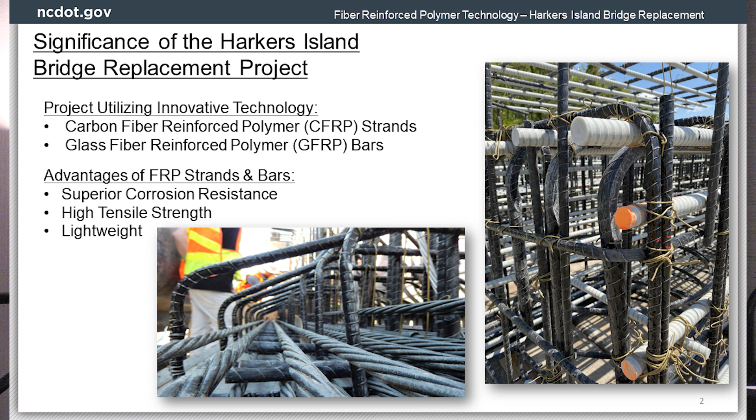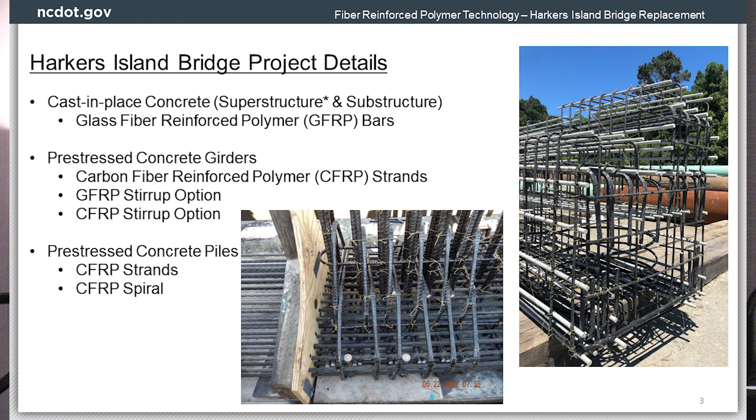For those not familiar with FRPs, the advantages are superior corrosion resistance, high tensile strength, and lightweight. Just to give you a little background about Harkers: for this project, all the cast-in-place concrete will be reinforced with GFRP bars. All the pre-stressed concrete girders and pre-stressed concrete piles will be pre-stressed with the CFRP strands. For the girders, we actually gave the contractor the option to go with CFRP stirrups or GFRP stirrups, but this time the contractor elected to go with GFRP stirrups.

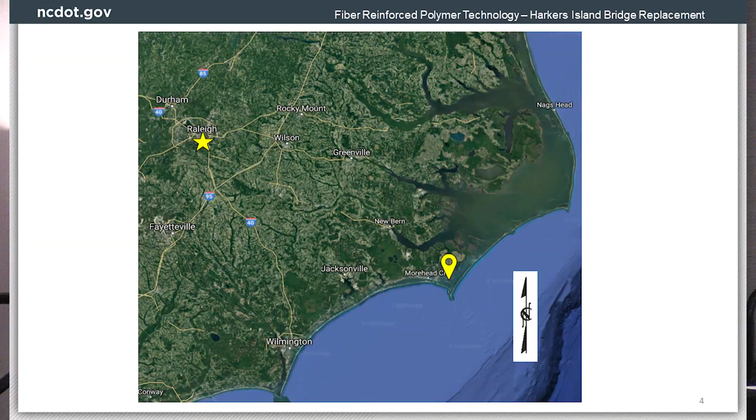To give you an idea of where the project is located, I'm sure you've seen enough maps of North Carolina the last few days that at least you'll know the geography. Here's the eastern half of the state - obviously we're here in Raleigh. Harkers Island is located about 3 hours east, near the port of Morehead City and the Cape Lookout National Seashore. For us, this area is considered highly corrosive, so the use of a non-ferrous material really is a primary candidate for creating long-lasting structures.

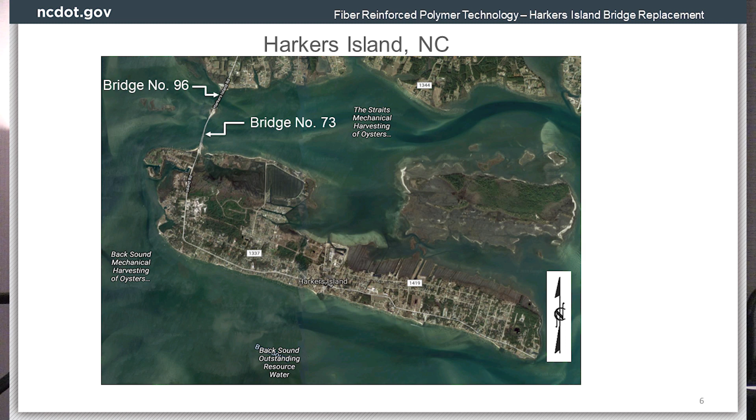It's a relatively remote area, home to 1,300 people, bordered by 2 inlets and the barrier islands. As part of the project, we're replacing bridge number 73 and 96 with a single structure.

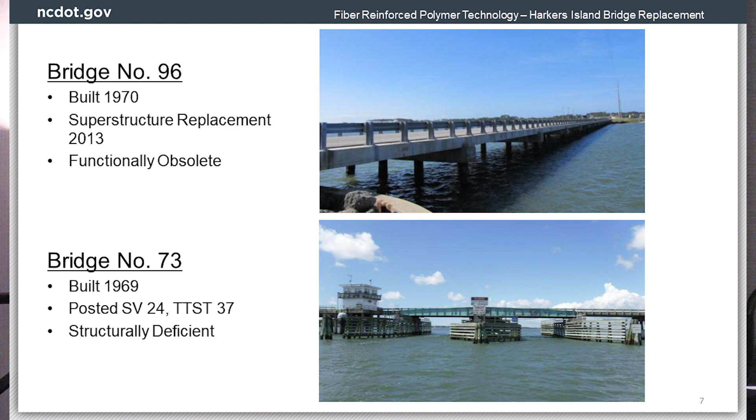Just a little background on the existing bridges: Bridge 96 was built in 1970, 600 feet long. In 2013, it required an emergency full superstructure replacement due to deterioration from corrosion. Bridge 73 was built in 1969, 1,400 feet long. It's posted, structurally deficient, and is a swing bridge. This bridge can routinely have mechanical issues and be shut down to boat traffic. The community is heavily involved in the fishing industry, so having that navigational channel blocked can cause issues for them.

So basically within these bridges, 40 to 50 years of age, they're already experiencing significant corrosion. We've had to replace the superstructure on one. So in looking at the development of a replacement project, the idea of using an FRP that is corrosion resistant really is why we honed in and identified this project as a great option for GFRP and CFRP.

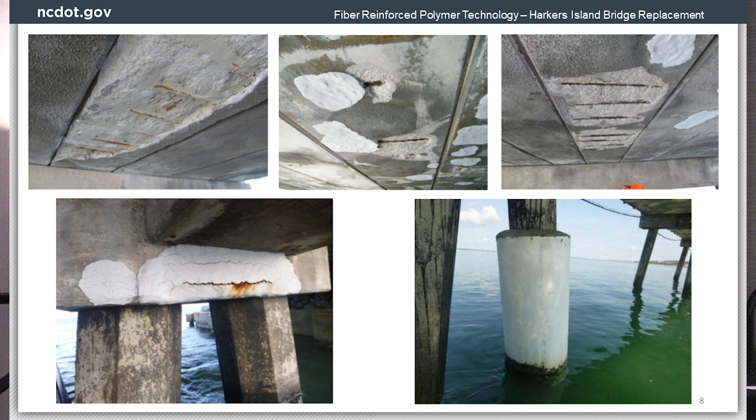Here's some photos of the existing structure. The bottom 2 are the substructure from the swing span, and the top 3 are the cored slabs from Bridge 96, before the superstructure replacement. You can see we've gone in there and tried to make some repairs - they work, but not long afterwards we're still having to go back and provide maintenance.

To give you more details about the Harkers Island project itself: the new bridge will be 3,200 feet long, 28 spans. As I mentioned, the girders and the piles will be using the CFRP - 115 girders.

44 of those girders will be 72-inch Florida I-beams. 56 of those girders will be the 54-inch Florida I-beams, which are about 100 feet long. The 72s, I should have said, are 130 feet. We've got 3 spans of the 78-inch fibs, and that'll include a channel crossing where we have a 165-foot girder.

So the let date was July of 21. Expected completion is 25, and the contract amount was just under $60 million.

Going back to the linear foot, we went through and figured up how many, once the project is complete, of CFRP and GFRP. So right there you've got 100, or 1 million linear foot of CFRP in the girders and the piles, and then close to that same amount with the GFRP with the substructure and superstructure.

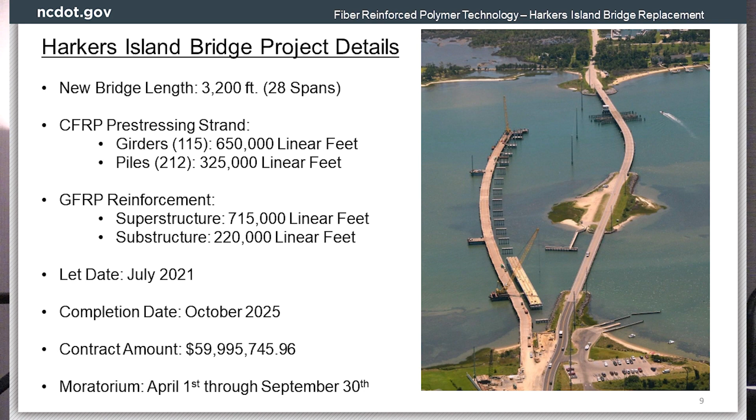I do need to mention the moratorium, so that was a big constraint for the contractor, there's no in-water work between April 1st and September 30th. So again, the project let in July. The contractor was able to start in-water work October 1st. So you can see from October 1st to March 31st, the contractor was able to pretty much install all the 24-inch pre-stressed piles from the abutment 2 side out to the channel.

And that ends up being 141 of the 212 piles.

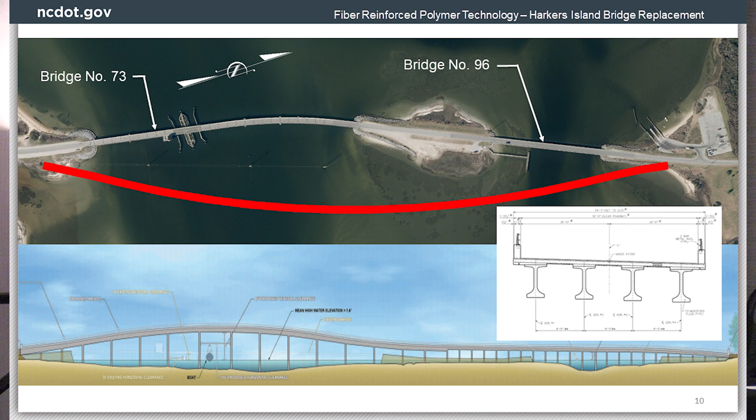The division requested that all the low-level spans provide a minimum of 8 foot of vertical clearance just due to wave action. So just looking at the FRP manufacturing process, I don't know how many folks are familiar with it, but we'll walk through it.

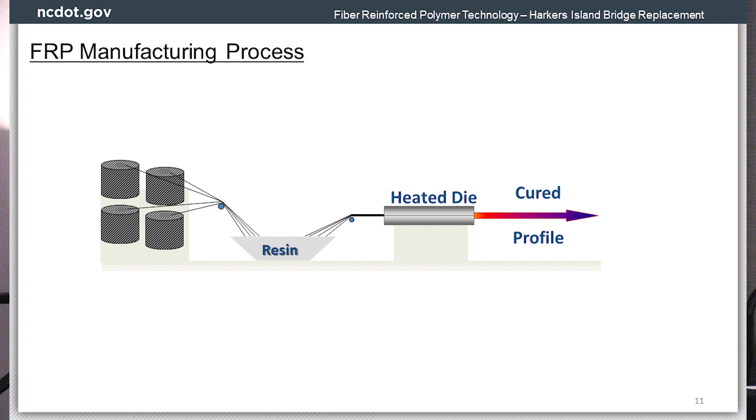So FRPs are manufactured through a process called pultrusion. The process starts as continuous fibers of either carbon or glass are pulled through a resin bath and saturated, and then as the wet fibers are aligned and pulled through a shaped mold, which is heated, that cures the resin. This manufacturing process is one reason you can't field bend FRPs. As a designer developing plans, that's really something to consider, that all this manufacturing has to be done in the plant.

There's no, if there's any kind of bars that show up out of spec, there's nothing the contractor can do, so just something to be aware of.

Again, it's really not a direct substitution. It's not a one-to-one on FRPs and conventional steel. The biggest thing is really the modulus of elasticity.

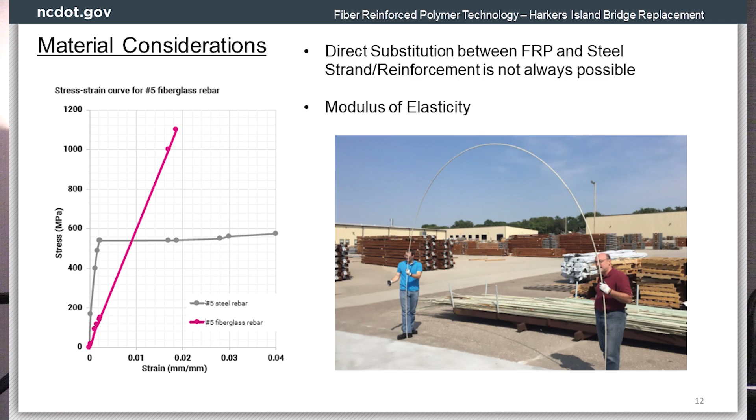So just a comparison between GFRP and steel reinforcement. You notice the guaranteed tensile strength for FRP is much higher in most cases. You do not have the yield strength, as I mentioned, and really keying in on that modulus, it's basically a quarter of what steel is.

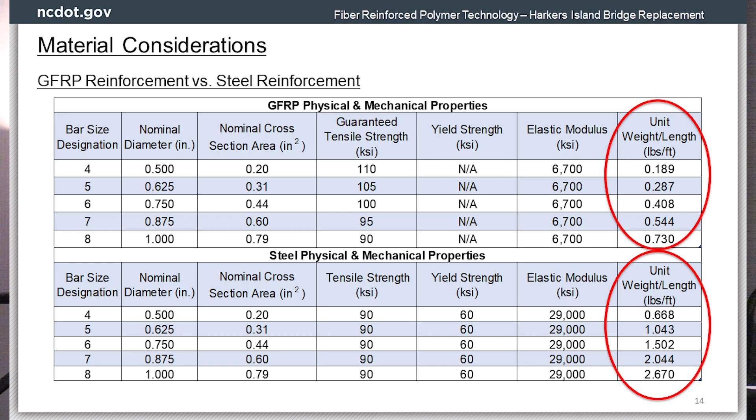I will point out the unit weight, which is, if you look at that number 8 bar there, it's 0.73 pounds per foot for a GFRP bar versus 2.67. So as you can imagine, a 60-foot number 8 bar is going to weigh roughly 160 pounds, whereas that same bar in GFRP will be 45 pounds.

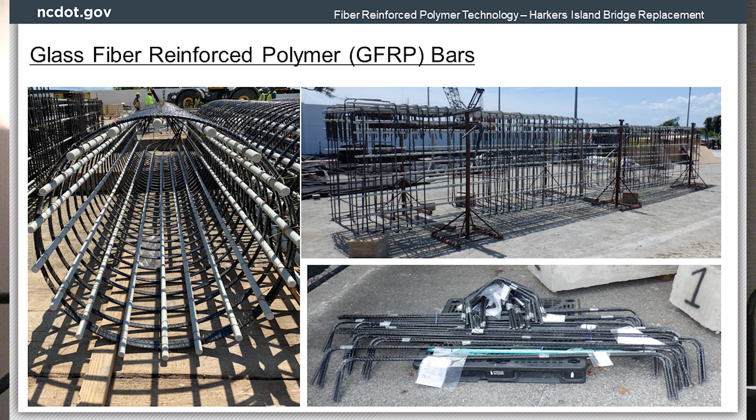So just showing some of the pictures from the site. The picture on the left is our column reinforcement for the pile footings on bents. Top right is a bent cap that's tied up, and the bottom picture shows the stirrups used for the pre-stressed girders.

I'll mention the black bar and white bar. The black bar, through the manufacturing process, is what the bent bars are. So any black bar you see, that's a bent bar, whereas the straight bars are the white bars.

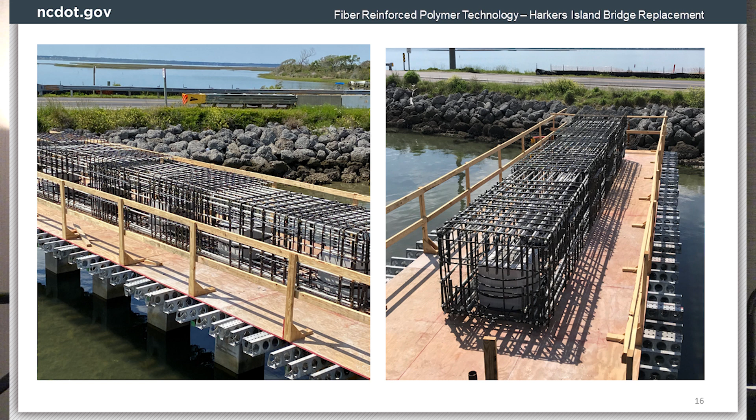A couple of bent caps with reinforcement in place, ready for side forms and concrete. Again, it's not a one-to-one substitution, so you end up with a fair number of more bars with GFRP, but discussing it with the contractor, he increased his slump and really hasn't had any issues with pouring, no issues with honeycombing. As long as we're aware of what we're getting into, it seems to have gone very smoothly.

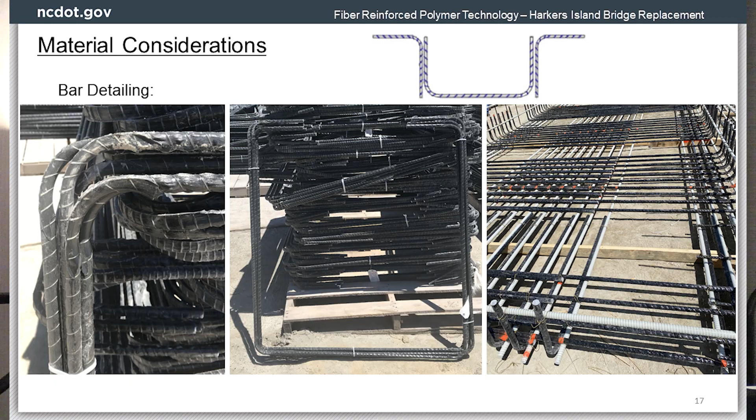The photo on the right is the bottom mat of one of our footings. Again, one limitation with FRP is the amount of leg length they can bend. The black L-shaped bar only goes a certain length before it's spliced with the white longitudinal bar that runs the full length of the footing. You've got to take those considerations, and you're obviously losing clearance between bars once you factor in the splice location.

Also, all of these bars in the footing are number 8 bars - that's the largest bar the industry can bend at the moment. This technology is changing, so when we developed the plans, that was the constraint we had. Not to say they can't bend larger bars now, but that was one challenge we had to overcome.

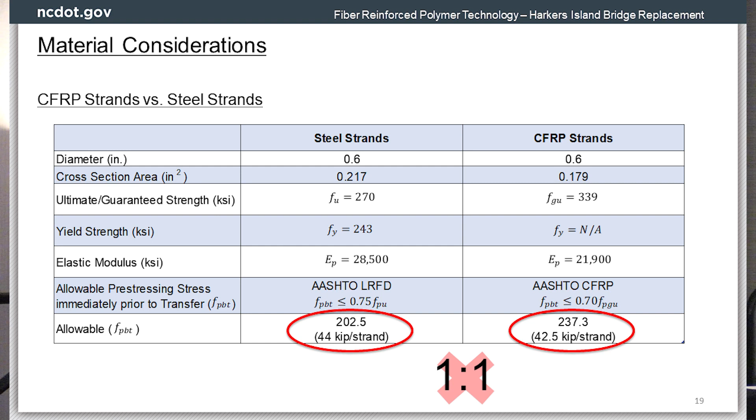Looking at the comparison between CFRP strands and steel strands, notice the guaranteed strength is 339 KSI versus 270, and that has since increased quite a bit. So factoring that in, it's basically a guaranteed strength of 60 kips for a 6/10 CFRP strand. Notice the modulus is slightly lower. The knockdown factor for AASHTO is lower for CFRP, so your allowable pull strength is slightly lower. As mentioned, the guaranteed strength has since increased, so it's more comparable, but there are still other factors in the design to consider.

We've partnered with NC State to do the QA/QC material testing for the project, and the guaranteed strength is listed at 60 in this case, but pretty much all the strand they've tested is breaking right around the 80 kip mark. So very conservative.

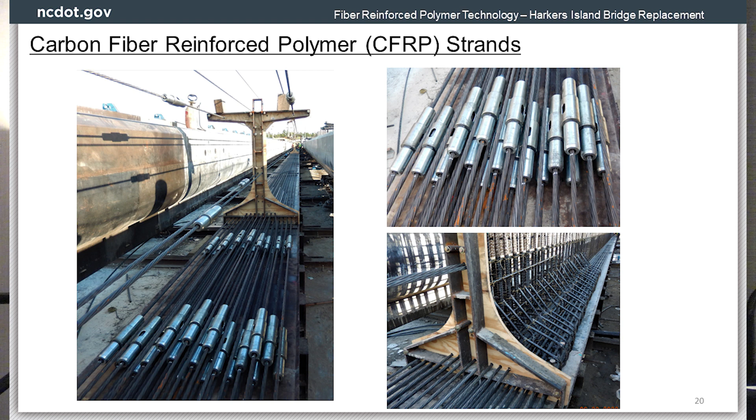You'll notice in the picture on the left, for a girder, you have a fair amount of strands in the bottom of the flange, so the precaster has to stagger those couplers, because otherwise if you had them all at one location, it just wouldn't be possible. That's one thing that needs to be considered as they're laying out their bed.

Here are some more photos of the girders. One thing for this project, we really didn't want any ferrous material in the girder, so we made a compromise and allowed them to use stainless steel lifting loops. But the precaster did request some courtesy strands to tie the GFRP stirrups to. They were concerned that if you tie the stirrups directly to the CFRP, it could put a fair amount of weight on there and potentially rupture the strand.

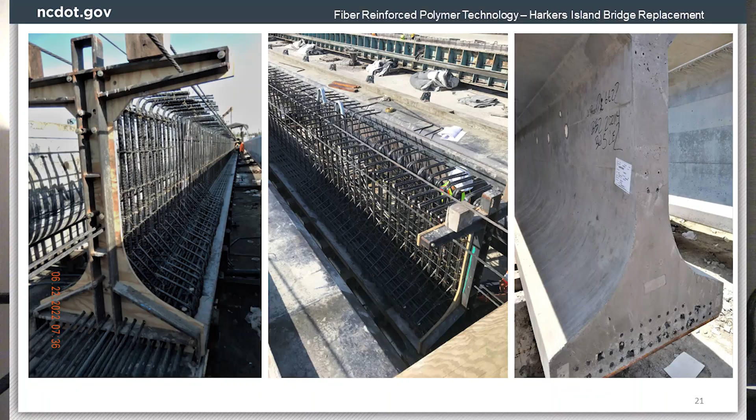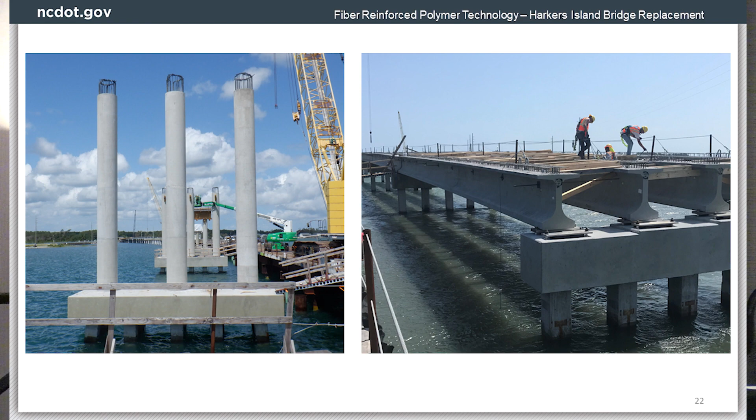As I mentioned, this is a corrosive site for us. Typically we would have precast, pre-stressed deck panels for the formwork, but we went with a lightweight deck in this situation, so the contractor's using removable forms. There you see, I think they've set 7 spans of girders so far.

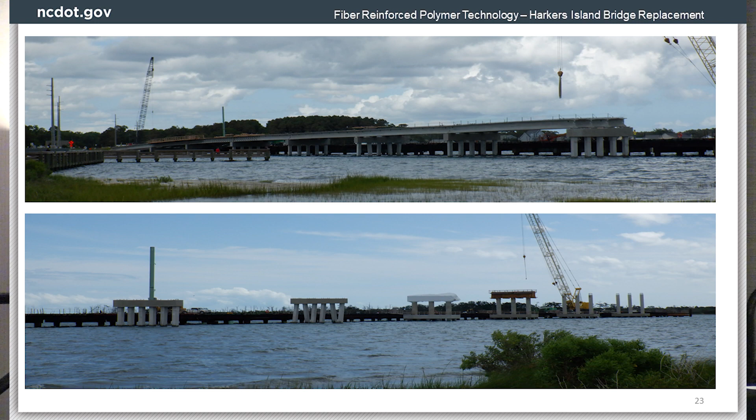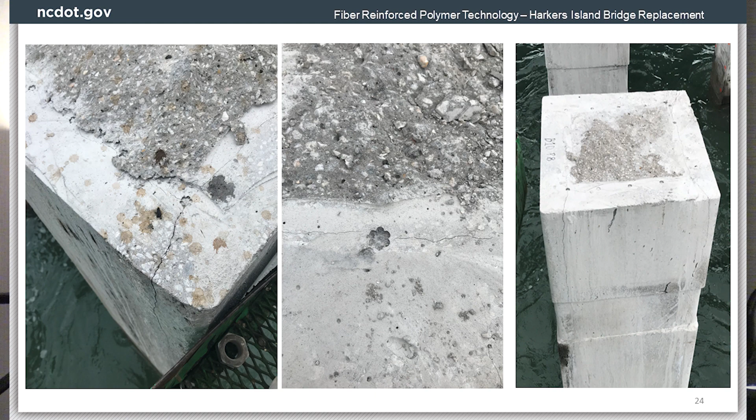Bents 8 through 14 there on the bottom. It's really impressive what the contractor's been able to accomplish in the first season. I think it's important to note that these materials are new and different, but the contractor's still able to carry on, meet schedule, and hasn't had any significant delays due to the material—especially even with the pile driving. Once they started driving pile, the comment was it's no different than conventional pile.

So I'm going to spend the next few minutes talking about lessons learned so far. Speaking of piles, one thing we learned is you have to consider the Hoyer effect, for those not familiar with it. It's basically as you stress that strand and then relieve it, it tries to return back to its original diameter—so you stress it, it necks down, relieve it, and it tries to return back.

For the first few piles that were driven, the contractor had a short window—he didn't get the project until July, so they immediately started casting piles and getting them to the site. October 1st they started driving. The way his template was laid out, if we had any battered piles, they had to go ahead and cut them off, and in doing so, once they cut them off, cracks started forming.

That was very alarming for us, and we weren't quite sure what to do about it. Going out and actually looking at it, the cracks conveniently were within the first 2 to 3 feet or so, which is the transfer length, and that's what ends up being embedded in the bent cap. So we felt comfortable—the cracks were solid, there really weren't any structural concerns.

But the interesting fact is that as they progressed—these piles were about 3 months old at that point—later in the season, once the moratorium was over and they were going back cutting the plumb piles, the photo on the right shows there's no issues, no cracking, no recess of the strand. These piles were, at this point, 6 months old.

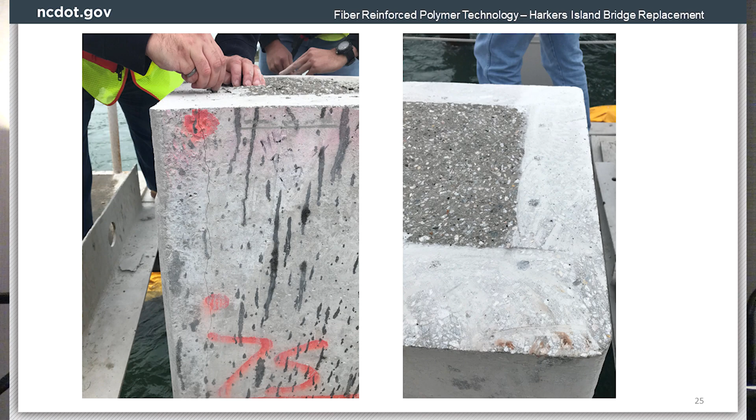It's 10 KSI concrete. So looking forward to maybe the next project, or even the island side of the channel, for those piles, if there's some way to build in a waiting period, that would be a good idea, because from what we've seen, you really don't have that cracking issue.

So that's something we're going to continue to monitor. Speaking of the Hoyer effect, we had this happen, and then several months earlier we had our first girder casting, so we really should have considered that.

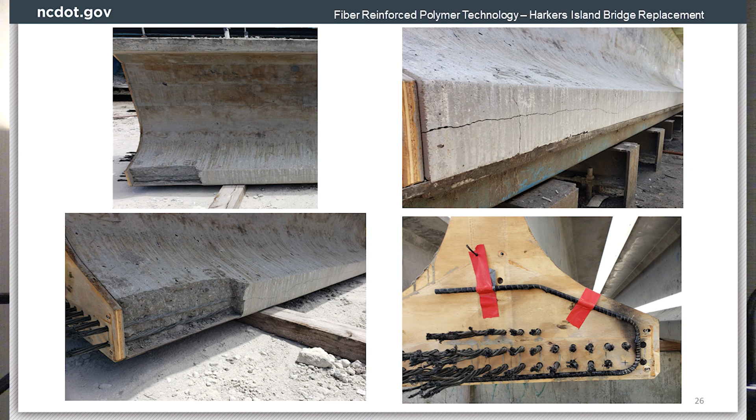They cast the first 3 girders, and this is what happened. For our typical steel strand configuration on our bulb tees, the 2 exterior strands are outside the confinement bars. In this case, we went along with that similar strand pattern, and as you see, it busted off the end section there. Again, it was 2 or 3 feet. The crack did continue, but it was fairly solid. So what we ended up doing, bottom right picture, we made sure we bring those strands inward of the confinement bars, and since that time we've had no issues with those types of cracks.

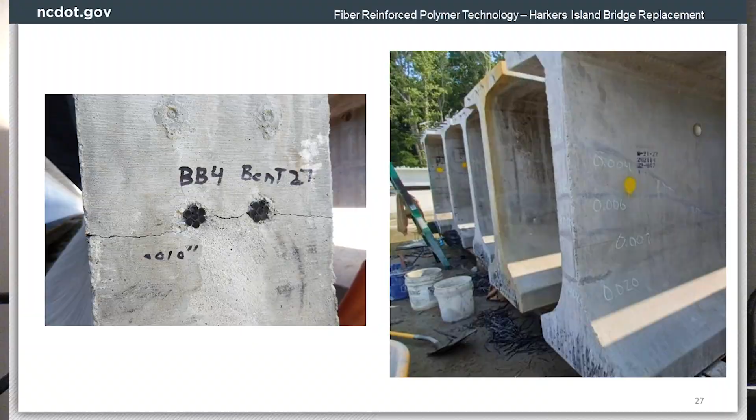Some more lessons learned from the girders. The picture on the left is the 54-inch bulb tee, with 2 strands in the web. We've got cracks forming along the web face, again 2 to 3 feet. On the right is the 72-inch bulb tee with web splitting. One thing we've done is increase the debond. We've debonded those strands in the web on the 54s 2 or 3 feet, and that's really done away with that cracking. We've increased the debond on the 72s and we're still getting some cracking, but it's minimal compared to what we were getting those first few castings.

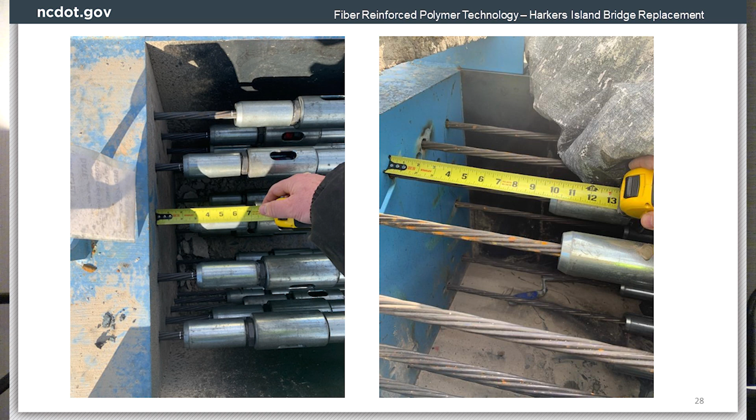The last lesson learned isn't so much for the designer or bridge engineer, but more for our M&T inspectors and the precaster. With casting the pile, in order to get economy out of their beds, the precaster ended up with a lot of short sections where the steel strand was basically right at the end of the form. You see the couplers there for the piles, but in those photos you really only have 2 or 3 inches in some cases, and in some cases 10. Certainly there were situations where they had much more to work with.

One issue we had during the first few castings is that as they were detensioning the beds, all of a sudden all of the strands would spontaneously detension themselves. Certainly a concern there, and I've got a short video I hope we'll play.

How do you play? Where's the mouse?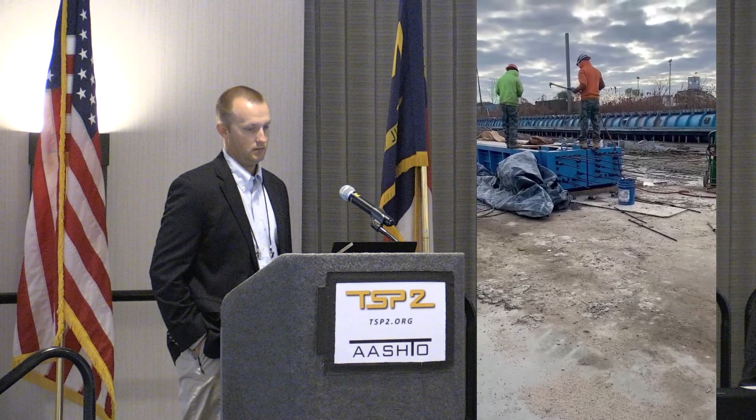Cables popping by themselves. So there you can hear the strands starting to go.

It sounds like he's seen this happen a time or two. This is not the first time it's happened.

So that's just something we're going to continue to monitor. Certainly it didn't happen with every casting, but it's something we'll have to keep an eye on. We've not had that issue with the girders, but the next set of piles will be interesting.

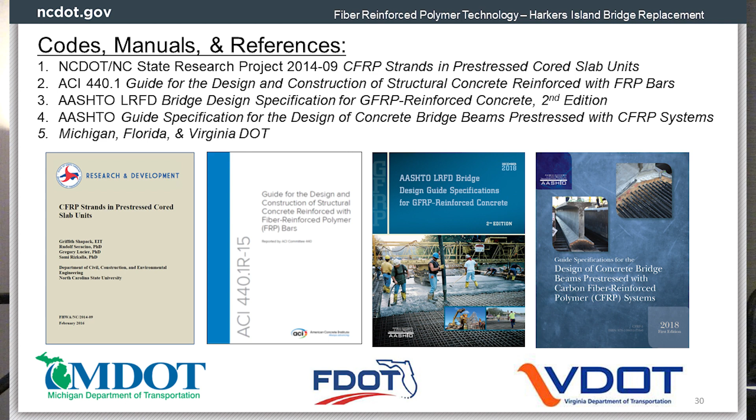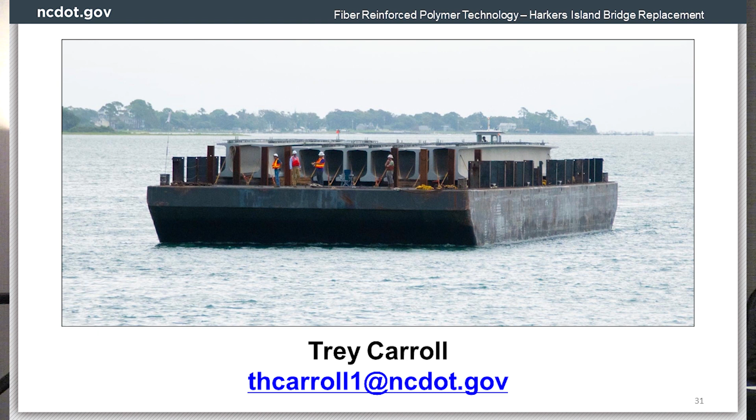If anyone's interested, there are some great codes and references available through AASHTO, ACI, and some research projects. Definitely want to mention Michigan, Florida, and Virginia DOT were instrumental in our plan development. Great resources. I'll leave you with this photo from earlier this week. The first 72-inch bulb tees were delivered to the site, so they'll start setting those. With that, I appreciate the opportunity and look forward to this project's completion.